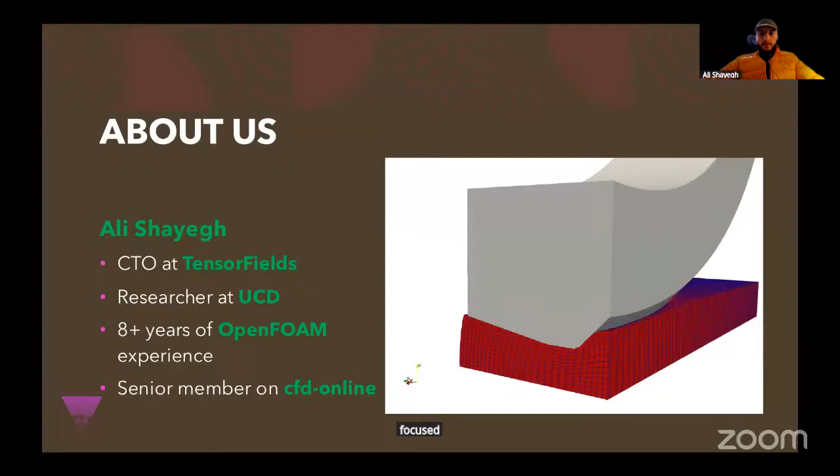I'm the CTO of TensorFields at the moment. I have quite a bit of OpenFOAM experience, and my current research is focused on deformation problems, which are highly sought after in the manufacturing industry. I have a video here of a rolling simulation, just one of the simple simulations that I do.

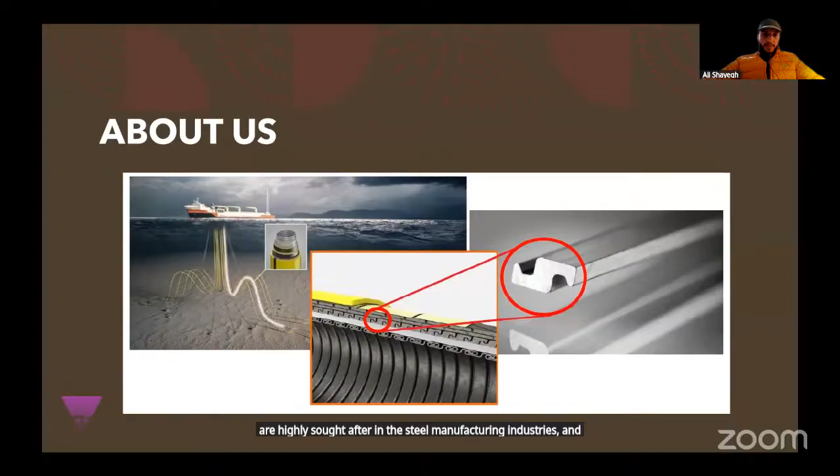The deformations I work on are highly sought after in the steel manufacturing industries, and those industries serve other upstream industries like oil and gas, automotive, etc. TensorFields was established around 2 years ago as an OpenFOAM training initiative, but it occurred to us that we also do CFD consultancy and physics-based modeling consultancy. We have some services you can see on our website, tensorfields.com.

So the goal of this meeting is to create engineering standard applications. Our focus is mostly on C++ and OpenFOAM. The agenda would be: to start writing code in C++, we need to learn a bit of C++.

I know most of you have hands-on experience with C++ programming, but we'll introduce simple code, writing simple applications and libraries in C++, and turn that simple experience we gain into a real engineering application—a PDE solver. We'll do so using OpenFOAM core libraries, which give OpenFOAM the strength that it has. So all of you know what OpenFOAM is.

This video is really nice—it gives us a sense of what a PDE is. Oh, that's interesting, it's showing an ad. Last time I tried it, it didn't show an ad. Let me try it once more. Okay, unfortunately it doesn't like us. I think I have this video here also, let me give it a shot.

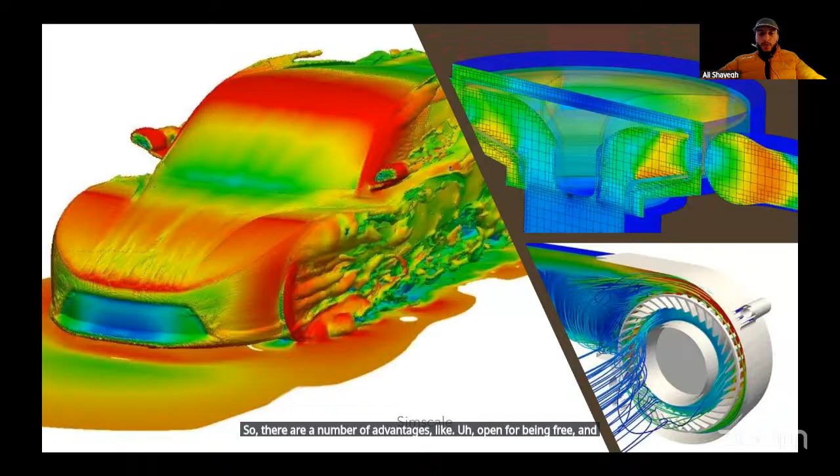So there are a number of advantages, like OpenFOAM being free and open source. There are also disadvantages, like poor documentation for sure. For those who want to start, the documentation is poor, and even when you get used to it, at some stages and with some libraries, the documentation remains poor. Also, open source codes sometimes struggle to fund their work because they need people to work full-time maintaining the source code, and since the code is available to everyone, no one pays for it. So the revenue stream is also a challenge for them.

A very quick introduction on the operating system that we work on. Well, we work on Linux, and despite all other CFD software like Fluent and StarCCM, OpenFOAM doesn't officially have a GUI. We work from the command line, the so-called terminal, and we do everything from a CLI, command line interface, rather than a graphical user interface.

Let's get into C++. We will open our terminal and write code soon. We'll start with the concept of a function. Let's say you want to make a lemonade. What you do is, let's say you are the juicer: you get the lemons, you peel the lemons, you cut the lemons, you add sugar, etc. Finally, you return the lemonade. So basically, what we see here, written in the syntax of C++, is that you, the juicer, get some input, you do some operations, and then you return the lemonade.

This is the solution. So if we get time, we will decompose our simple circle application into 3 different files: a header file, a library source file, and an application. But for now, let's keep it the way it is.

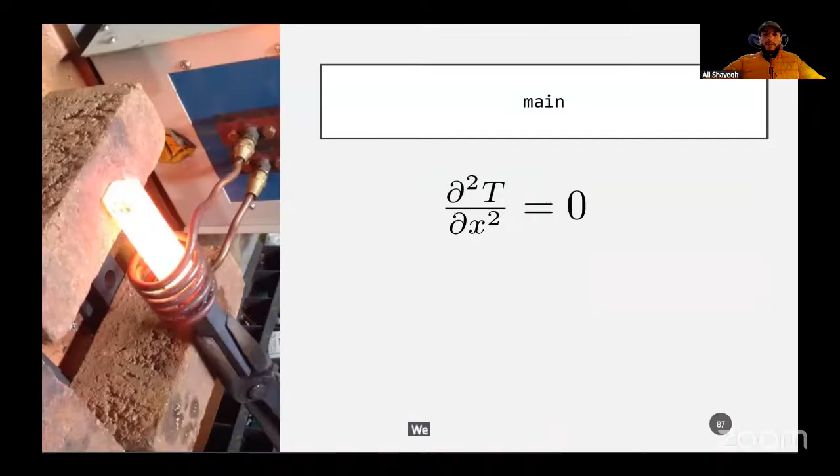And now we get into the main part of the training. We wanted to solve the PDEs, right? So let's get into the math a bit. The way we solve a steady state heat conduction equation, as a simple, maybe the simplest PDE that we normally come across, is...

First, using the finite volume method, let's say your domain is a one-dimensional domain. The right side is cold, the left side is hot, and you want to obtain the temperature distribution along this rod. So what you do is decompose your domain into a number of cells, then integrate your equation over every single cell. That leads you, after using the Gauss theorem, to an algebraic equation for that single cell, which relates your cell's temperature with its neighbors, like we see here. If you do this process for all the cells, you will end up with a system of equations.

So to code that, let's start with discretizing the domain. I will go back, and since finally we are going to make a wave equation solver, I will create a directory called wave. Where are we actually? Okay, wavefoam - I create a directory called wavefoam. I go into wavefoam and create a waveFoam.C.

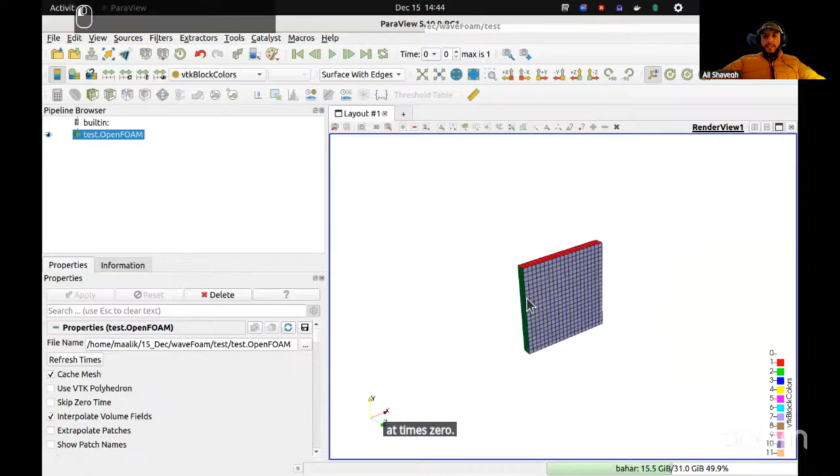Did it come up? Yes, it did. So this is my mesh at time 0. I expect that at time 1 it becomes twice as large, and it does - so from time 0 to time 1. It was just an example of mesh manipulation.

You can also print other data. For example, after doing so, let's say info - you remember that we used cout from the standard library. In OpenFOAM namespace, you use Info instead.

Number of cells is mesh.nCells, if I'm not wrong... yep. And line - so the number of cells is going to be printed here.

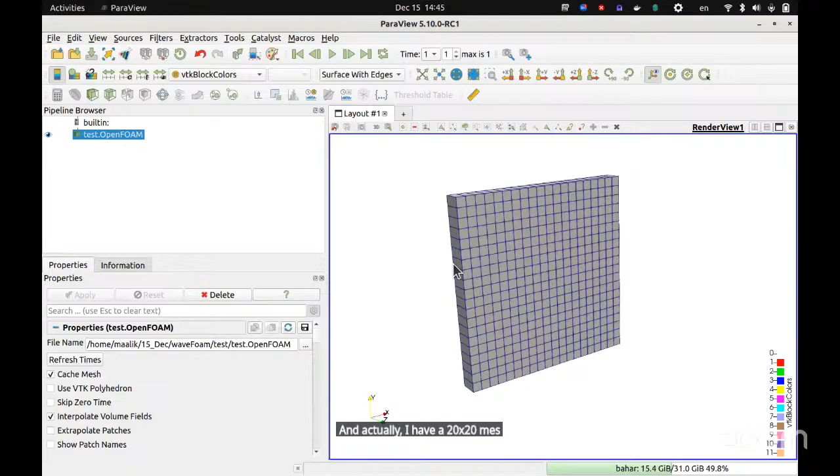Actually, I have a 20 by 20 mesh, so the number of cells should be 400. Let's see if it's able to produce that number. I go to my test and waveFoam... yes, the number of cells is 400.

polyMesh.h, public - okay, so everything labeled under the public keyword here can be called through that function that we have. For example, we have - okay, actually most of those interesting functions are in another class that...

polyMesh inherits from. The polyMesh class actually inherits from primitiveMesh. We didn't cover inheritance in this short course, but it means that when some class inherits from another class, it has access to all the public functions of that other class. For example, primitiveMesh has a number of interesting geometric attributes.

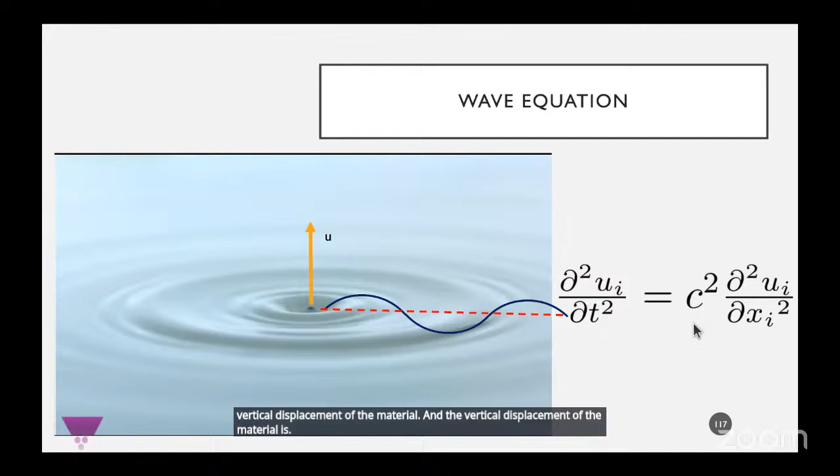So as you remember, during the finite volume procedure, we discretize this equation into a system of equations, and what we solve is actually that system of equations. We translate a PDE into a system of equations, and that system is what we solve. So in OpenFOAM too, we don't create a PDE, we create a system of equations.

One of the strengths of OpenFOAM is that it mimics mathematical syntax. For example, for this term we have d2dt2(u), because it is the partial squared over partial t squared of the variable u. And fvm stands for finite volume implicit.

We want our unknown in the new time step so that a system is formed. If we assume all the unknown variables are at the current time step, they are not unknown anymore - they are known, and we do not end up with a system of equations. Therefore, fvm is implicit, time-implicit finite volume discretization. Again, for this term, the same thing applies: fvm Laplacian of variable u multiplied by C2.

So we'll implement that now. I'll go to waveFoam and create my equation.

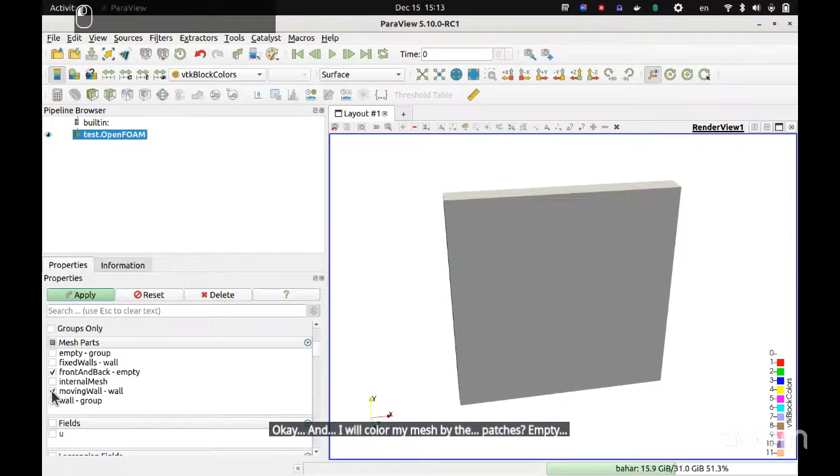I will color my mesh by the patches: empty, moving wall, and fixed walls. So this white wall is the moving wall, which we specified the displacement to be 100. For the red patches, we specified 0 gradient, and the front and back, which is green, is empty.

The next thing is, if I run waveFOAM, I will get an error, and the error is that I cannot find wave properties. So I will include wave properties also. Vim constant wave properties, foam file, dictionary.

And I specify C2 to be 1e minus 5 for now. And then let's see what happens.

So the next thing is FV schemes. What is FV schemes? Because when we discretize this equation, we have different discretization schemes for time discretization, for discretizing the Laplacian term. You should specify how you're going to discretize, and to do that we use an existing FV scheme. We don't write it from scratch.

Let's go to foam tutorials, fluid, cavity, system, FV schemes, and let's copy FV schemes and FV solution into our system folder. We need D2DT2; we accept Euler. So we set the default to none, and we specifically use D2DT2 of U to be Euler.

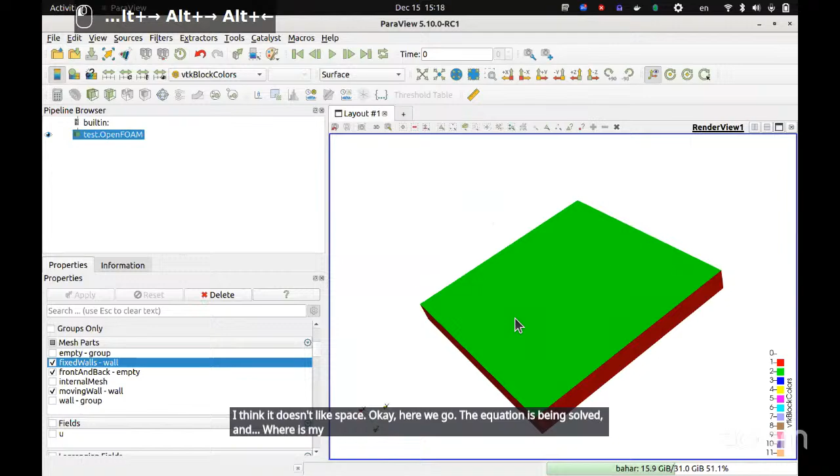Okay, here we go, the equation is being solved. Where is my ParaView? This is my ParaView. Okay, we just solved the wave equation over this, and I can show it a bit more professionally.

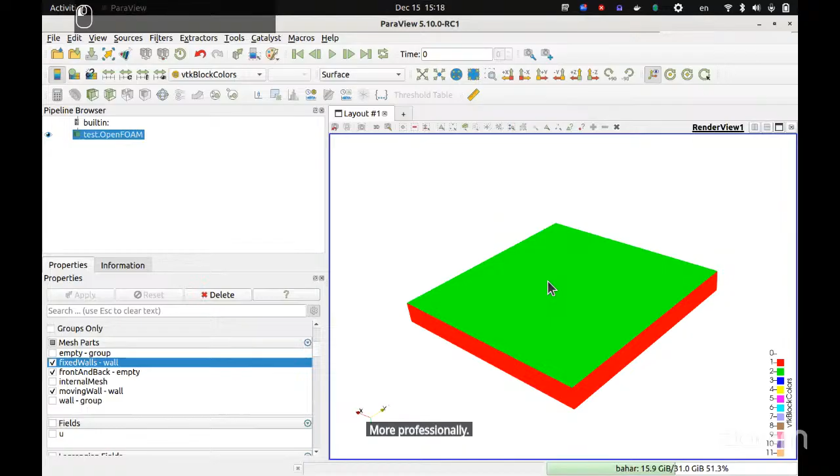I will add the filter called warp by scalar. I'm just dealing with these zoom controls all around my screen. You don't see them, but because I'm the host, I see all of those things.

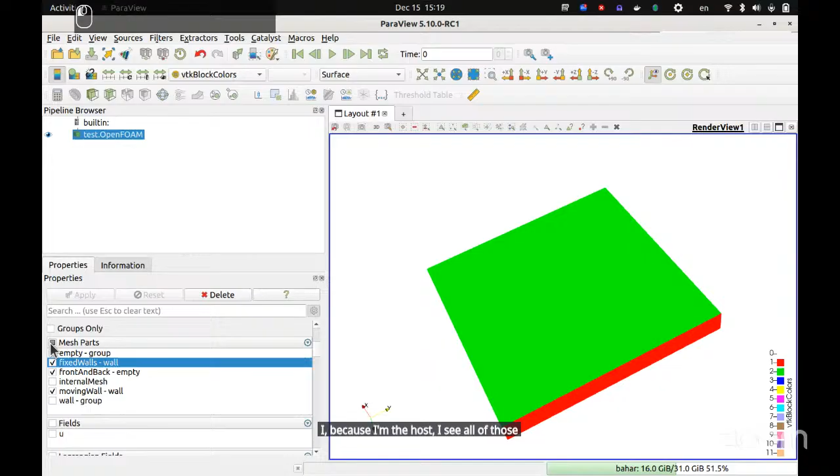So the internal field, where is it? First of all, we need to enable the field, and then I'll color the field with U.

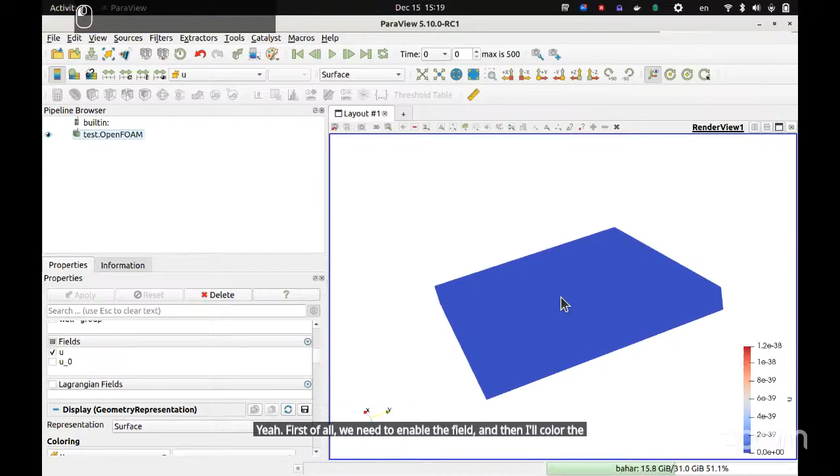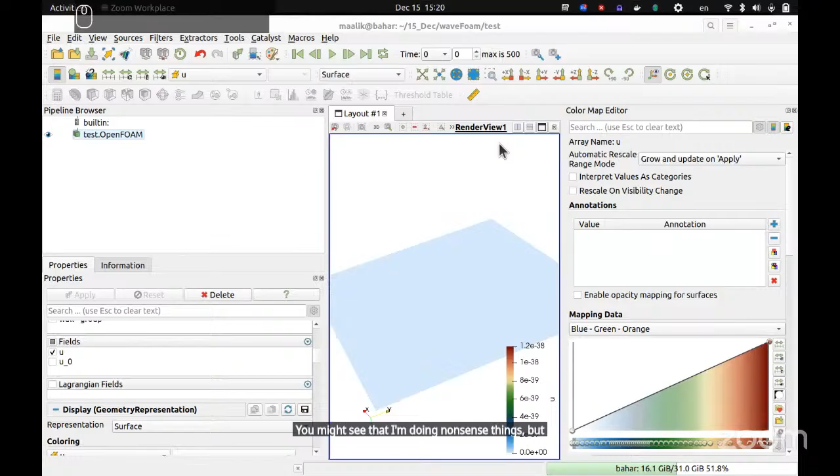And maybe I can change the color map to this. Apply. You might see that I'm doing nonsense things, but every place that I click is some zoom control, and I'm not able to do my job.

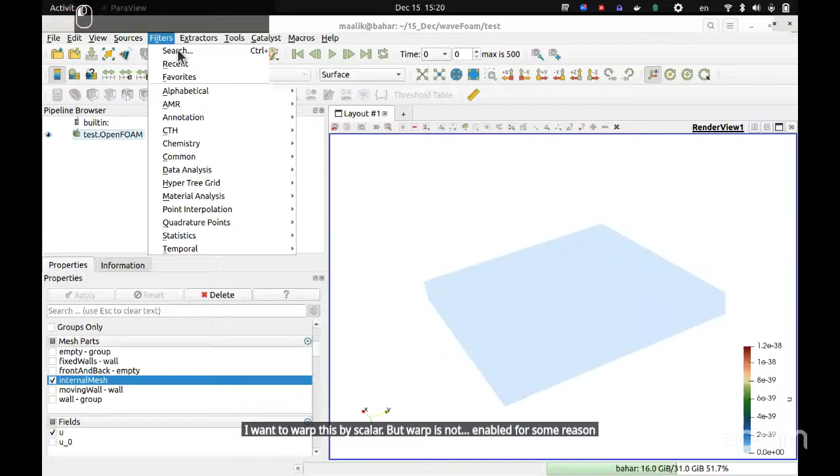So the next thing is warp by scalar. I want to warp this by scalar, but warp is not enabled for some reason, that's strange actually. I don't know, maybe I need to reload it.

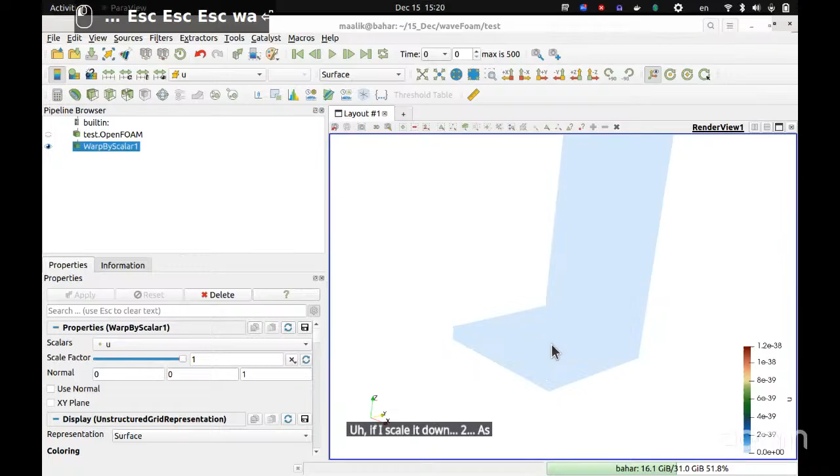Yes, warp by scalar. So actually, if I scale it down, as you remember, let me show you the surface with edges. As you remember, we specified the only wall called the moving wall, we specified the displacement at that boundary to be 100, and everywhere else the displacement is 0. So I'll reduce it to some factor.

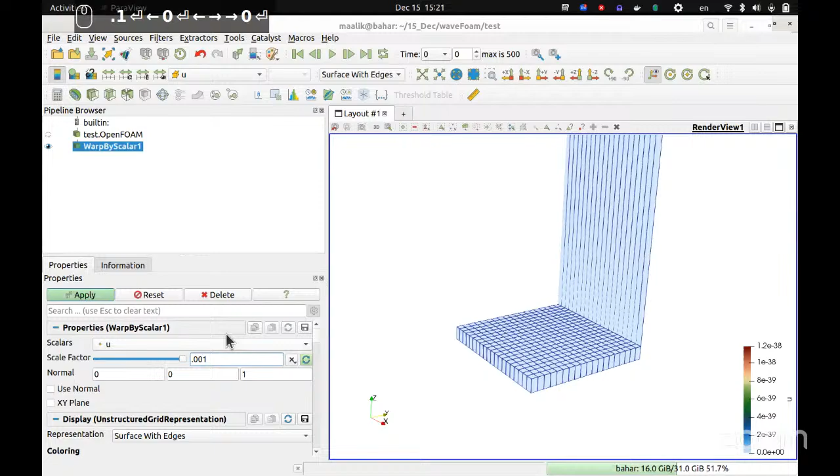Cool, and I play the animation. So this is, as you can see, the 1D wave. This is the propagation of the 1D wave.

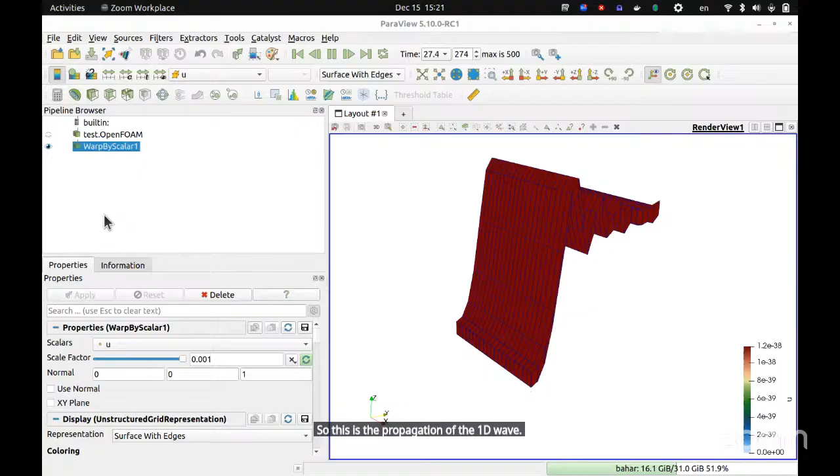It can be 2D if we specify the... okay, so it can be 2D. To create a 2D wave, I'll do something else. I'll foamListTimes -rm.

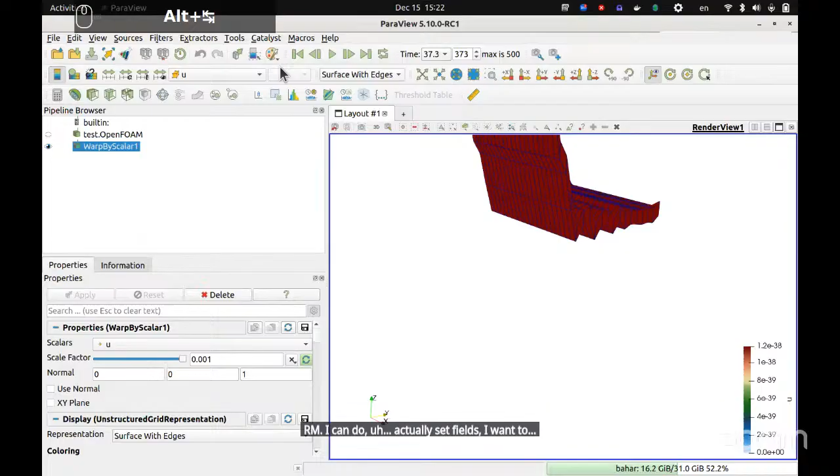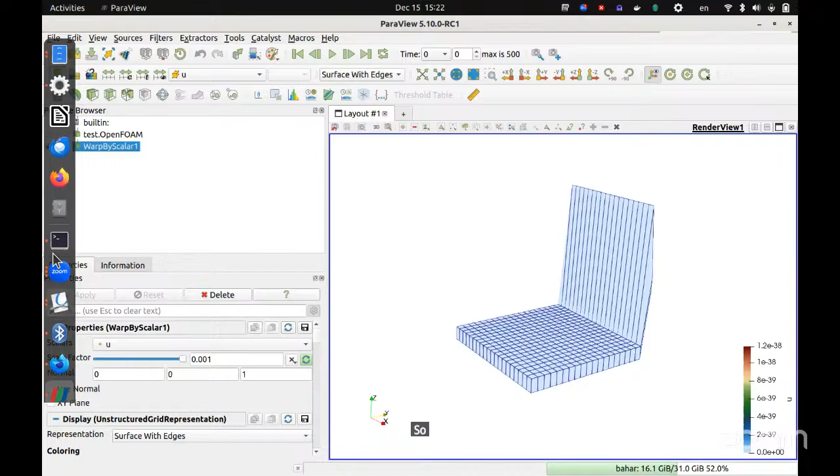Actually, let's set fields. If I go back to the initial test case, you can set the value of u at the center of your domain to 100 and keep your boundary as 0, and then let this disturbance diffuse through your domain. I have this test case elsewhere, I'll just show you since I'm not sure if we have time to do it here. Maybe it's handier for me to just show you.

So if I just go run, and parafoam... we are actually reaching pretty much the end of the session in 7 minutes, so I just want to show you how that 2D wave works.

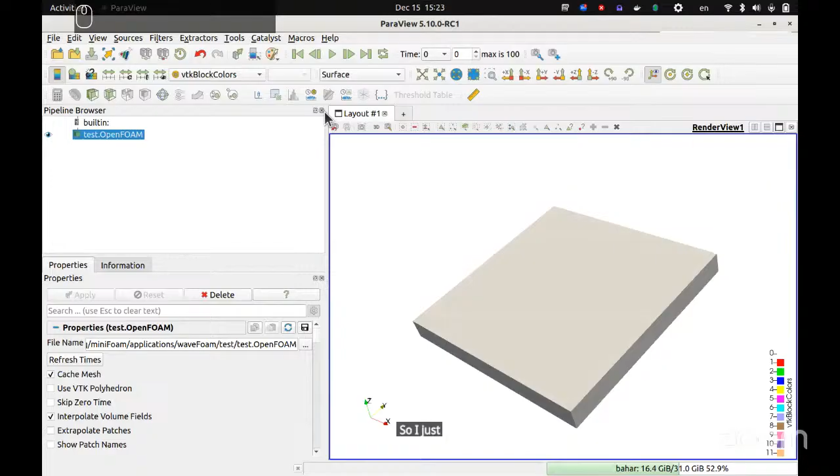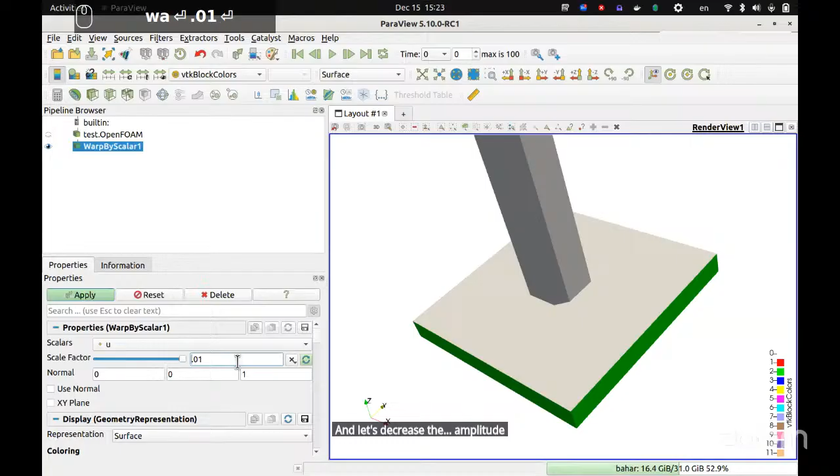I think I don't have you here, so let's enable you and let's warp by scalar, and let's decrease the amplitude by a factor of 100th. Okay, we have a perturbation at the middle, and then when we play this, the wave propagates.

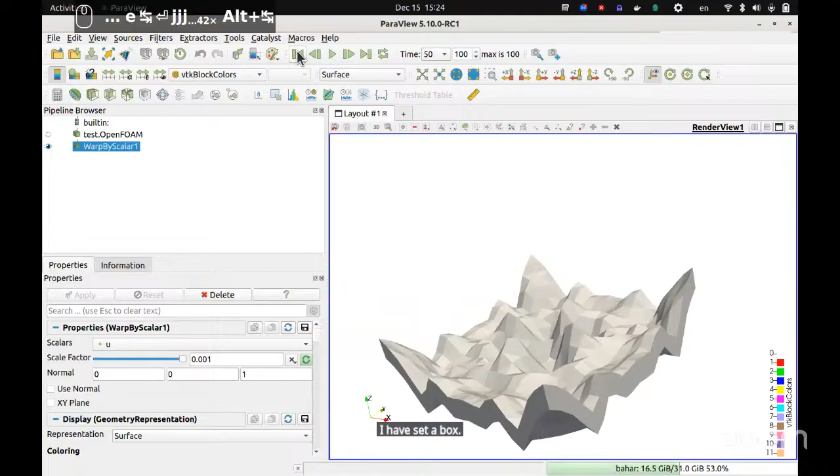So what is different in this test case compared to what I just showed you is that in my system I have a setFieldsDict where I have set a box in the middle of the square, and decided the value at that box to be 100, and the rest of the boundaries are zero gradient. This simulation causes such a wave propagation.